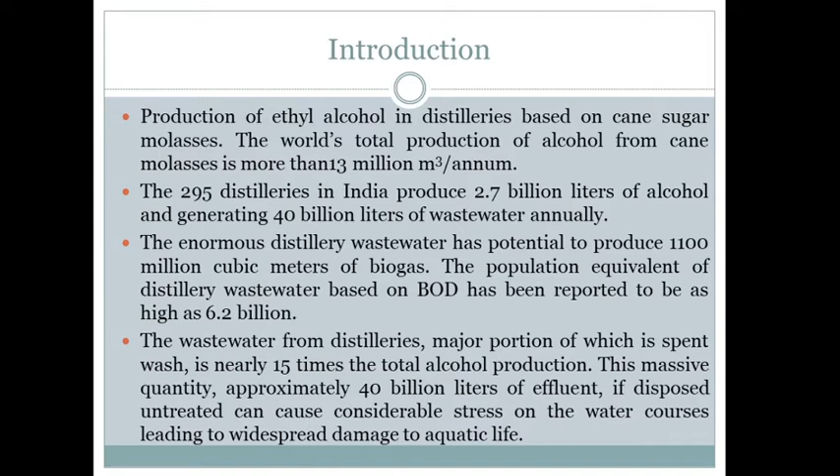Okay, and if we directly dispose that untreated wastewater into a watercourse, it leads to various diseases and also damages aquatic life. So that's why we need treatment of the waste generated at distillery industries.

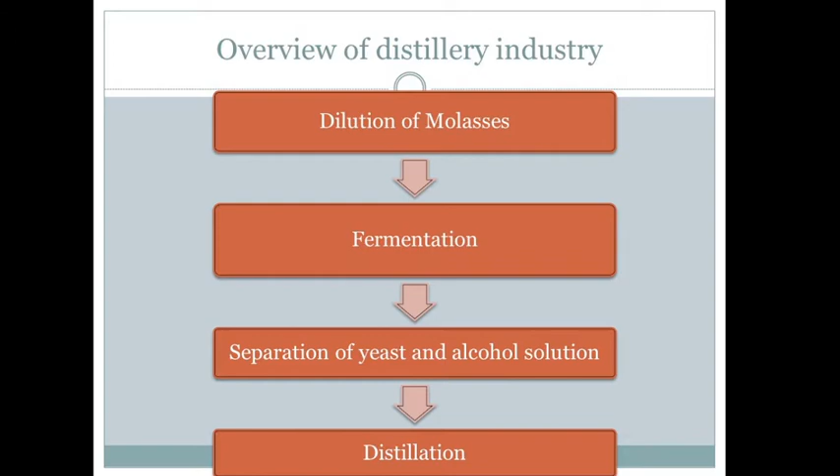So what is the overview of the distillery industry production process? First, collection of molasses, then dilution of molasses, then fermentation, next separation of yeast and alcohol solution, and lastly distillation. So in this way, various operations are carried out at the industries.

So dilution. In dilution, the molasses available from the sugarcane mill has solid content varying between 76 to 90%. Okay. So first, the molasses obtained from the sugar mill is diluted, because it contains solids up to 76 to 90%. So the dilution is carried out, that is, the molasses is diluted.

Next, fermentation process. Fermentation is the production of alcohol from the fermentable sugars in molasses solution. Okay, so next what happens here? Production of alcohol from the fermentable sugar in molasses solution.

Next, separation. The substrate is separated into alcohol solution and sludge by centrifugation. Okay, so by the process of centrifugation, the sludge and the alcoholic solution are separated. Okay. So the substrate is separated into alcoholic solution and sludge by centrifugation.

So centrifugation is a process for the separation of solid from liquid. Okay, so here in centrifugation, the alcoholic solution is separated from the yeast sludge. So the recuperation of yeast is important in order to reduce the organic load of wastewater.

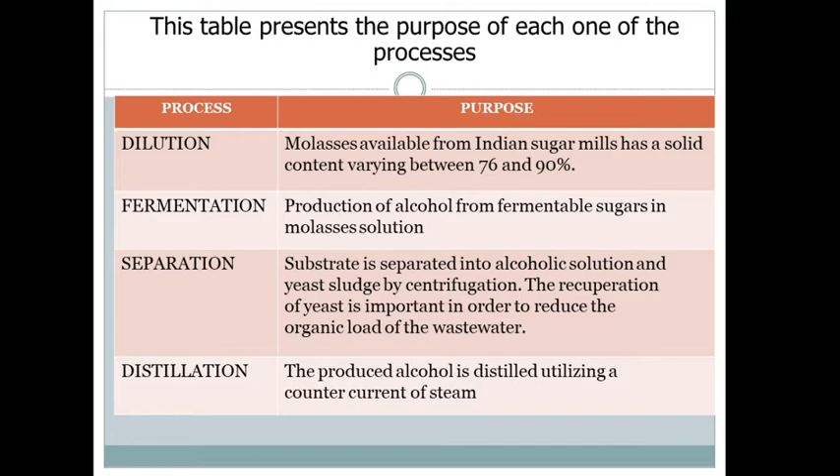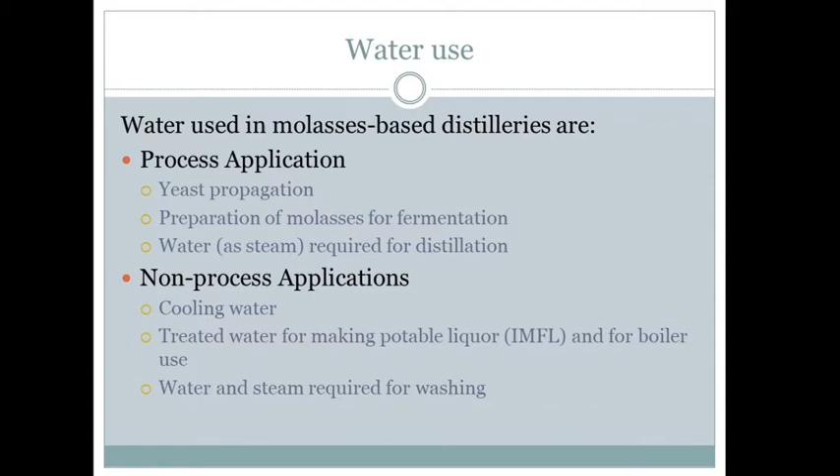Okay. Next, water use. So water use in molasses-based distillery industries includes process application and non-process application. So where is the water used? First, in yeast propagation. Next, preparation of molasses for fermentation, and water or steam which is required for the distillation. Okay, so in this process, water is used in the distillery process. Next, non-process application, like cooling water, and treated water for making potable liquor. Next, water and steam required for washing. Okay, so these are also the sources of wastewater.

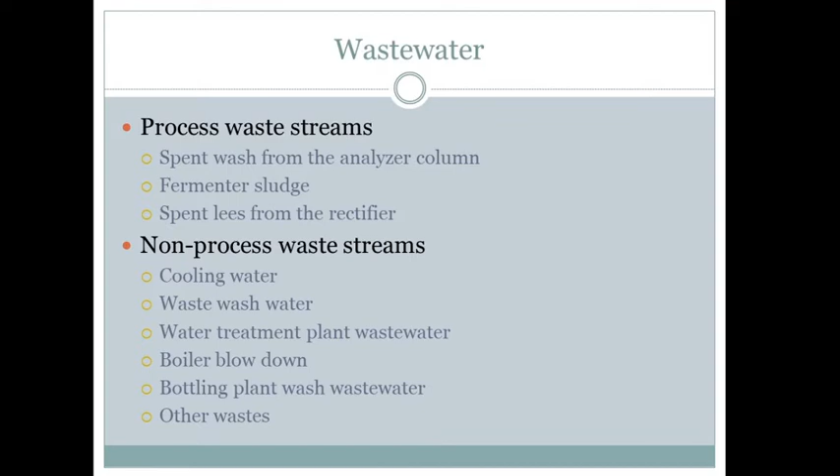Next, process waste stream, that is spent wash from the analyzer column, fermenter sludge, then spent lees from the rectifier. Non-process waste stream, that is cooling water, waste wash water, water treatment plant wastewater, boiler blow down, bottling plant wastewater, and other waste. So these are the different wastes generated from the process of distillery. Okay. So these are the processes which are carried out.

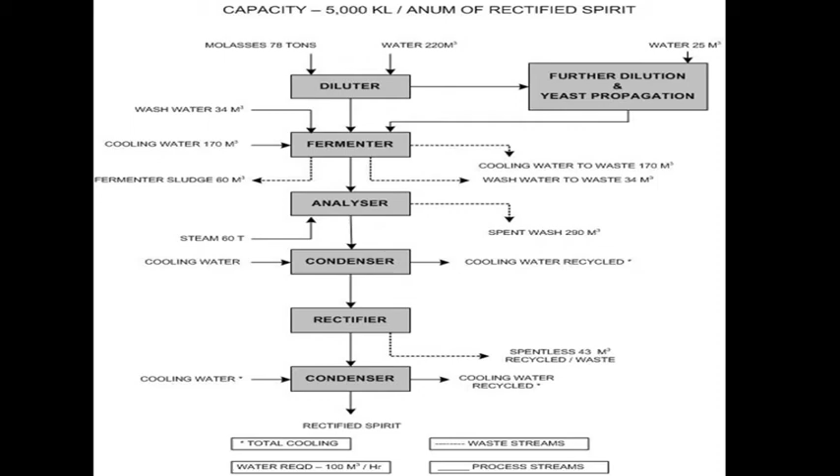Okay, so what are the effects on the receiving stream? If we dispose that distillery waste, what are the effects on the receiving stream? So all types of waste from breweries and wineries are not toxic to biota. Yes, so all types of waste are not toxic to the biological system. So high BOD results in DO depletion and causes odor. Okay, so if the BOD content is high and it is directly disposed, that leads to DO depletion.

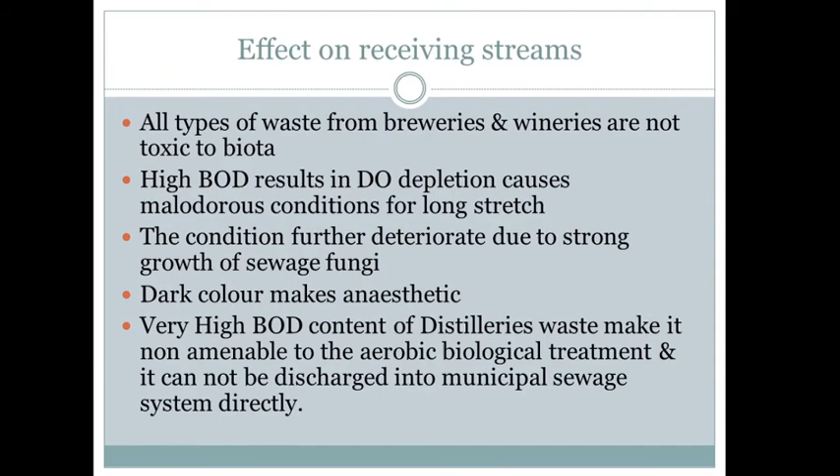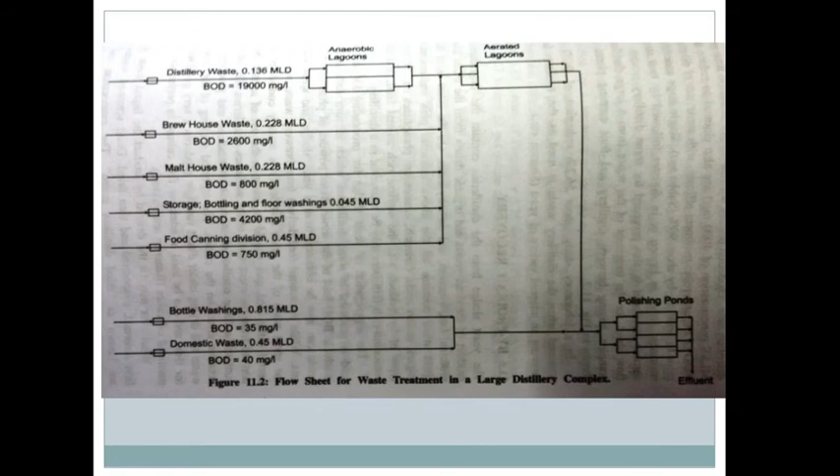Okay, so this is the flow sheet for the waste treatment in large distillery industries. Okay, so first the waste collection, which contains huge BOD. Okay, next the process, that is the anaerobic lagoon. The anaerobic lagoon is followed by the stabilization pond, which you can also call the polishing pond, and finally you get the effluent. So disposal of effluent or recycling of effluent. So this anaerobic process is followed in the treatment of distillery waste.

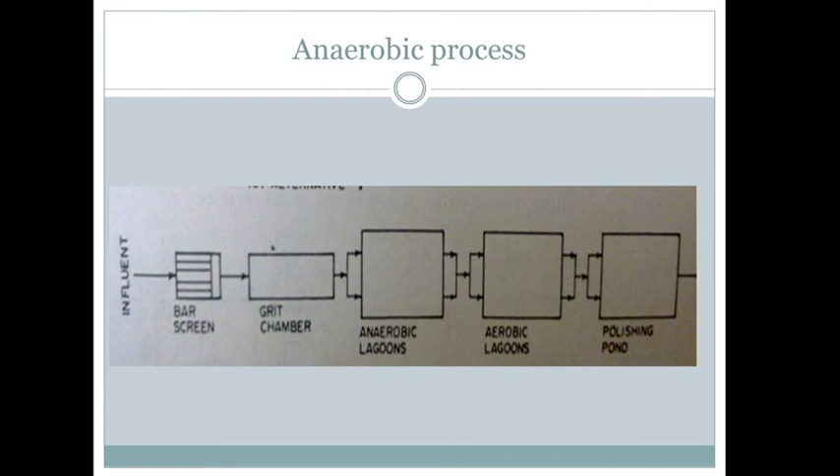First, the collection of wastewater. Next, bar screen for removal of large and suspended solids. Next, grit chamber for removal of grit, which has a larger size, like sand and other broken particles or glass particles. Next, anaerobic lagoon. Second, the aerobic lagoons. Next, finally, the polishing pond, that is the stabilization pond, and finally the effluent. Okay, so these are the biological aerobic and anaerobic processes which are used for the treatment of organic distillery waste.

So some suitable anaerobic processes which are used for the treatment of distillery waste, like UASB, that is the upflow anaerobic sludge blanket reactor. So by using this method we can treat the wastewater. Next, the anaerobic filter, that is the fixed bed reactor, a reactor with an inert filter medium with a high specific surface for growth of the biomass. And mostly plastic material is used, with external separation and recirculation of sludge. So that is the anaerobic filter or fixed bed reactor.

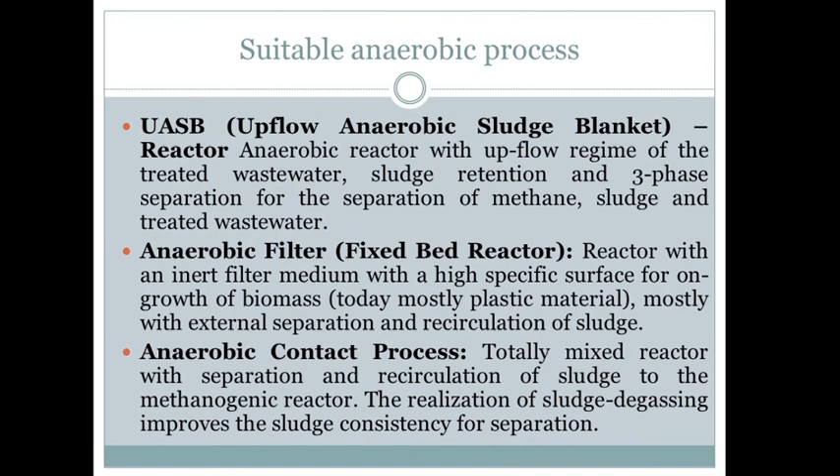This system is also used. Next, anaerobic contact process. So these are some of the suitable anaerobic processes which are used for the treatment of distillery waste: UASB, fixed bed reactor, and anaerobic contact process.